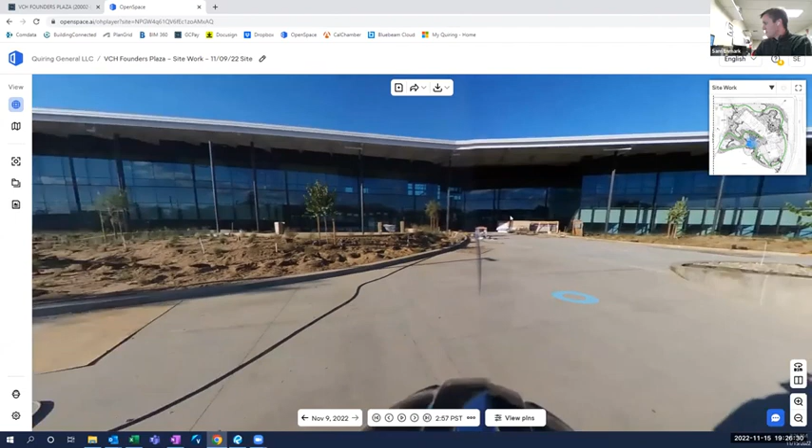Yeah, okay, so this is the Founders Plaza building that we're doing out there. So you can thank Jaime - actually, this right here is Jaime. So this is an admin building for them.

The goal with Valley Children's is, if you guys have heard of OSHPD or HCAI, it's a hospital regulatory agency which makes hospital square footage extremely expensive. So what they're trying to do is move as much of their non-patient care services out of the main hospital and consolidate them into this building. This building will serve HR, finance, marketing, contracting, rev cycle, and offer a space for them to host their guilds, which is their fundraising opportunity.

So that's this building. And like Cary was saying, we're also doing all of the infrastructure out here - improvements of all the roads and landscape areas around this project and throughout the hospital. And then the front yard project, which is a very, very cool landscape job in the front, and it'll be a really cool main entrance to the hospital. So that's the gist of what we've got going on out here.

You can kind of see it from the backside - looking at it, it's a pretty cool looking building, I think, anyway. Yeah, no, it really is. So Valley Children's is probably one of our biggest clients right now.

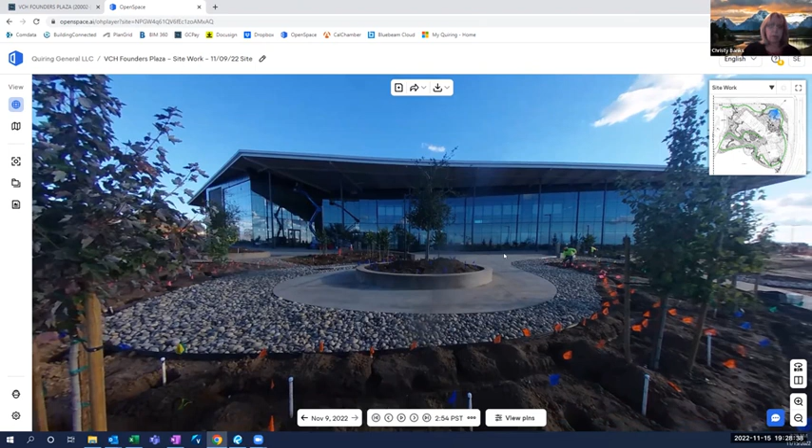We've been doing a lot of their satellite facilities - there's one down here in Bakersfield, there was another one in Madera, and one in Modesto. They're beautiful facilities, they do a really nice job of their designs and stuff like that, and so we partner a lot with them for design builds. This was a full design build project. Did you guys have any problems with like glazing or anything getting that, or any supply chain issues?

Yes, on supply chain issues, not in this case with the glazing. I'd say our biggest hiccups have been electrical components and our elevator. And for a while there, it was our metal decking on this facility as well. That stuff was very hard to come by, because that happened during COVID, if I remember right.

The shortage, yeah, that was rough. I've completely blocked that out of my mind, I'm so into the electrical components. But yeah, the metal decking, which is usually a 6 to 8 week lead time after submittal approval, was 7 months for us.

Electrical is probably one of the biggest shortages right now that we are seeing. Circuit breakers, switchgear, panels, anything of that kind of normal stuff that you normally get off the shelves instantly is really hard to come by now.

So generators, and why is that? Why do you think that is? What's causing the delay? We're seeing certain components, especially in electrical. On our elevator, I can tell you there was one specific component that they needed that was almost impossible for them to get, and they're not getting them in the quantities that they need, so production slows down. It's all coming from China, their electrical component that they needed.

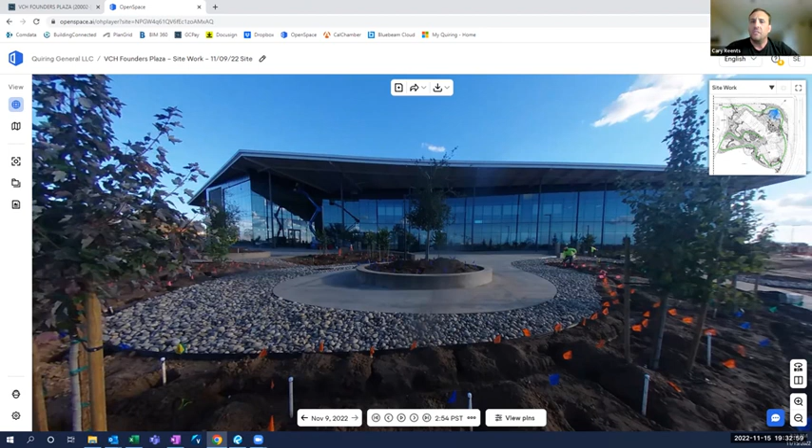So it's a very difficult thing to do, especially in the hospital world. There's some hard lessons being learned right now by hospital staff trying to do their remodel projects to get up to compliance because of that. There's been a few where we just physically cannot get material, so they either delay it or get a variance or something of that sort. I'd say more and more our design is being driven by schedule, probably more so than it ever has been before.

Sometimes there's not an option. It's what is available, and that's what we're going to design to. You're right, Christy, it is crazy. Which is a crazy funny world we're living in right now.

Available at that time, but you never actually know. Unfortunately, I don't know—everyone's heard about all the inflation, right? So what might cost $1 today might cost $1.20 tomorrow at the drop of a hat by a vendor.

So on my job specifically, we were building around a VRF system through Mitsubishi, and unless your product was on a truck coming that day, all your material went up 15%. So trying to explain that to a client during the permitting process—hey, we either try to change the product to save you $500,000, or you pay the $500,000—but trying to figure out what that means in terms of time too.

So in your design, now you have to change to a new product, and then lock in that material as well. All these vendors are being surprised by their own suppliers too, so it's kind of an odd little game going on right now. But yeah, we do the best we can. Yes, we do. There's always a win, we can find it somewhere.

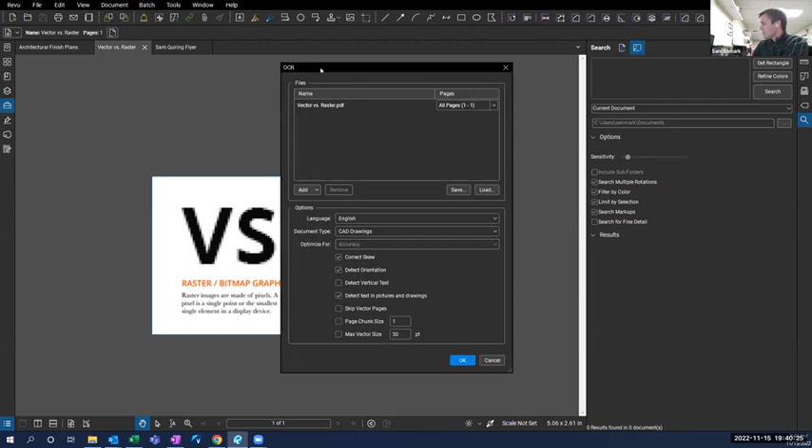There's a bunch of different settings and dialog boxes you can click on. I typically keep just the standard settings it has, unless I need something very specific, but I'd say like 95% of the time this is all going to be okay. And then I hit OK.

It's going to take a second to run the OCR. Obviously the bigger document you have, the longer this will take. This is a relatively small one, so once it gets started, it's going to go fairly quickly.

So it's done that. If you notice, it's now unsaved - it's got a modification to it, even though we didn't really change anything. So if you OCR something, you'll want to make sure you do a control save on that. Otherwise the OCR will go away if you close the file.

So now if I come back up here to the search bar and search vector, I'm now finding those vectors. This is a very small PDF here, but if you have a set of specs that is 1,000 pages long that's been scanned in and sent to you, being able to search is pivotal. You're not going to reinvent the wheel every time you go in there looking for a certain word, right? You can just come up here to Control Find and search for whatever you're looking for, and it'll bring up all of the instances that show up in that PDF.

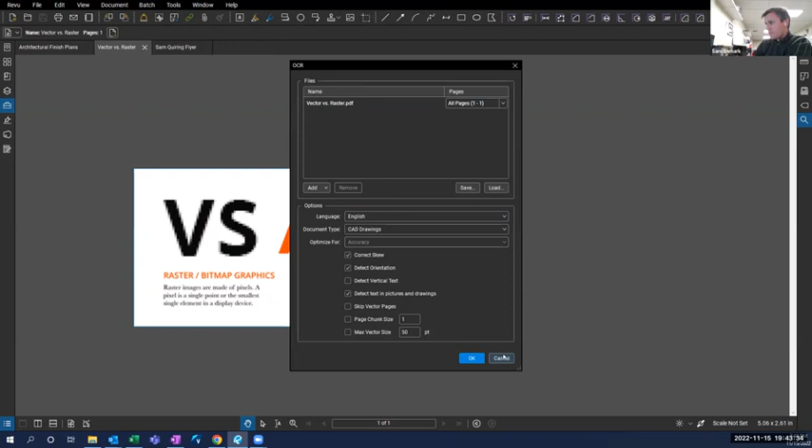But how I did this is I came in here to Batch and then OCR, and then ran it from there. And Sam, I think our licensing is always the newest license, so we should have Extreme. So students, if you have not updated your license and you can't see the OCR, that could be why.

Okay, it looks like Ninod got it. It answered. Yeah, I was gonna say, this is also helpful.

So when you have the OCR option, like control find, you can actually search by image as well. Like if you want to find an instance where there's fire extinguishers or something like that on your plans, you should be able to search that way through the OCR too, right, Sam?

Yeah, that will make everything searchable. And that's part of it, if you wanted to use that as a quantity takeoff tool, you could search and use that in your quantity takeoff.

So I like to foreshadow a little bit. So here you go. It's almost like we worked it out, Cary.

So if you go up here to the search bar, the item to the left is for text, and then the item to the right is a visual search. So you can do this, get a rectangle, and then search a specific item.

This would be an image, or like in Cary's instance, a fire extinguisher, and you can search it, and it should show all the different versions of that. So I know this is text, but it also works for visuals.

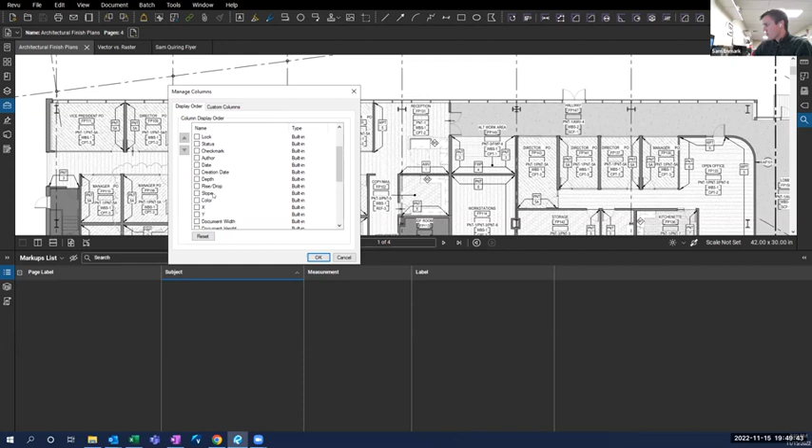So that's how I kind of have these set up, so that all of the information that I get when I start to do my quantity takeoff can be exported and can be used once I get it outside of Bluebeam.

So with that, if there's no questions on setup of the markups list, I'm going to start going through how we do some of these quantity takeoffs. And the first most important part is making sure that your pages are calibrated.

In order to do that, there's a few different ways that you can calibrate a sheet in Bluebeam. The first is going to be the architectural scale, if they list that. So you can zoom in, see, okay, this page is going to be 1/8 inch to a foot. So I'm going to come up here to this calibrate tool right there - excuse me, I'm not going to go to the calibrate tool.

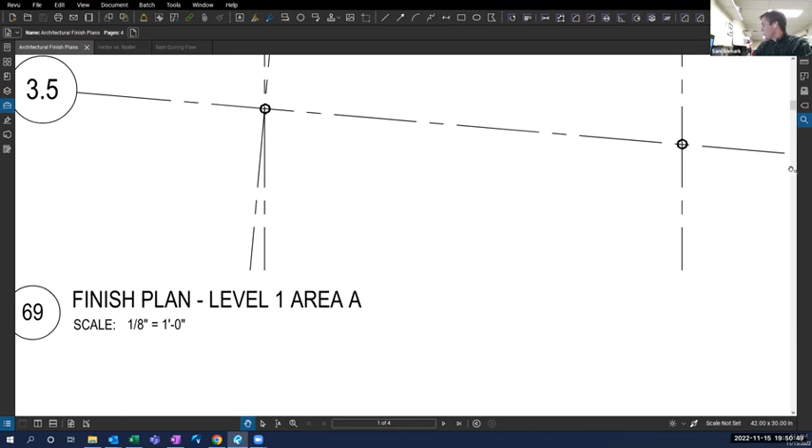I'm going to come over here to my settings, to measurements. And instead of hitting calibrate, I'm just going to select from the drop down 1/8 inch equals 1 foot. And then I can come in, and a trick of the trade that I've learned is always check your scale before you move on to anything, even if you do set it.

So if you look at this sheet, there's really not too many dimensions on it. It's an architectural finish plan, doesn't really have anything. So what I always go off of is something that I know, and I know that this door is 3 foot, right? You'll find a lot of times most of your doors are going to be 3 foot.

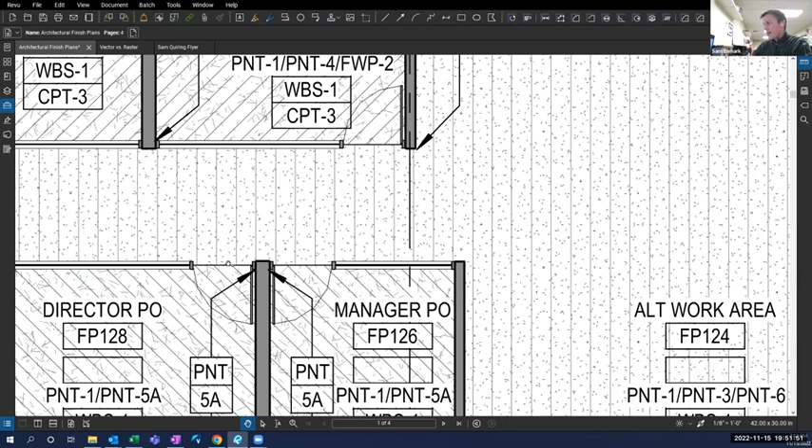Some of them may be a little bit off, so make sure that you're not getting too far out there. But I'll go here, and this should scale out right at 3 foot, right? So I know that I'm good calibration wise with 1/8 inch equals 1 foot. Okay, so that's one way to calibrate the sheet.

The other way is going to be by selecting a dimension that you know. And again, this would be an awful sheet to do this by selecting a dimension that you know, because there's no dimensions on it. But just to show you how this would be done, I know that the dimension between grid line D and E is 30 foot.

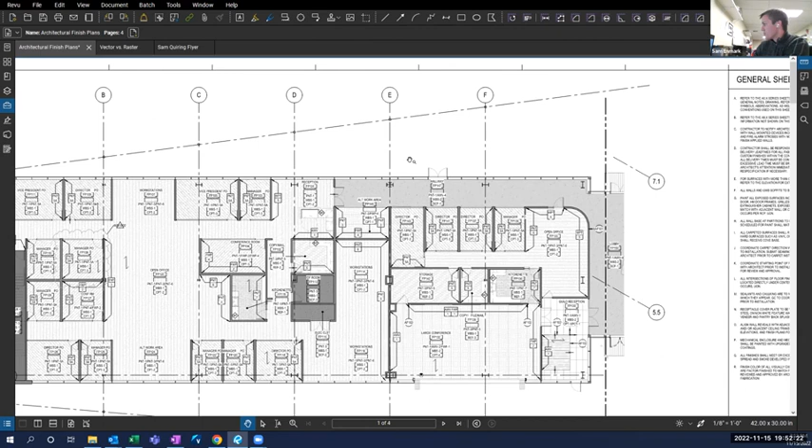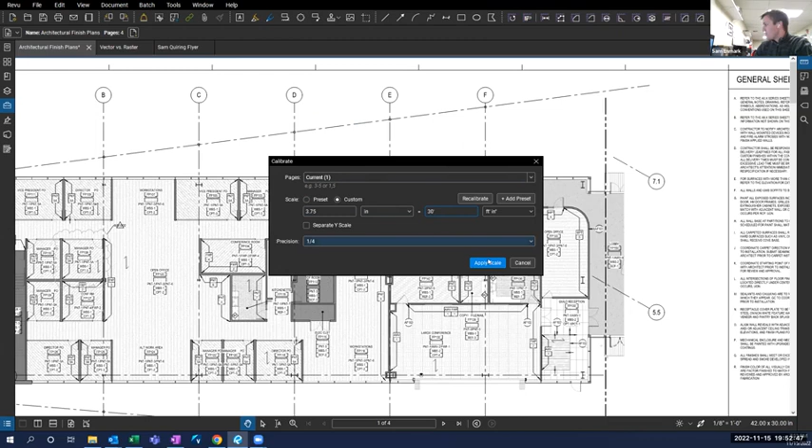So what I'm going to do is hit the calibrate tool. It's going to have me pick 2 different spots, and you want to make sure that this line is at 90 degrees. Select that, and then it's going to say how this reads will be - it took a measurement on the sheet of 3.75 inches. So you're going to say that that 3.75 inches is 30 feet, and then apply the scale.

And then again, I'm going to want to make sure that this door down here is 3 foot. And it is.

So with that, I now know that this sheet, and this is going to be where I'm spending most of my time here, is calibrated. So all of the measurements that I take on this sheet are going to be good. The worst thing that can happen is you forget to calibrate, or you calibrate it to the wrong scale, and you spend an hour doing a quantity takeoff on something, and the measurements that you get are completely wasted or no good because all of the work that you did was in the wrong scale.

I would also say that confirming the architect scale is important. I had this happen on this project. Our civil scale should have been 40 feet, but it was listed as 80 foot, 1 inch equals 80 foot. So everything I did based off that 80-foot scale was wrong when I did my takeoff, because the architect or civil engineer had the wrong scale on their drawings. So double checking based off of a dimension that you know is always good.

Can I throw in a hint there too, Sam? I got two more for you. One, be careful if you set scale to not apply scale to all pages. Not every drawing has the exact same scale size. Architecturals on this sheet might be 1/8 of an inch to a foot, but when you get to the details, some might be 1/4 inch to a foot or something of that sort. So be careful about applying that to every page of your document. They're not always the same scale.

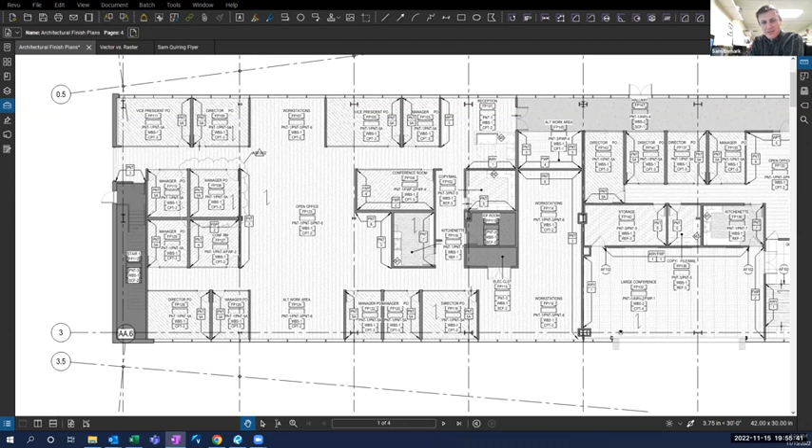Yeah, just to build off that, Carrie, in order to do a quantity takeoff, you're gonna have to scale these drawings and do that. However, if you're ever a field engineer or you see a superintendent out in the field laying something out after they've scaled a drawing, raise your hand, because that's not how it should be done. There should be dimensions on the drawings that you can do the math from in order to figure out exactly where this wall lays out.

And keyword: should be dimensions. Sometimes it's exhausting, because I could tell you within a couple seconds how far this wall is from this wall. But if you don't lay it out off of the dimensioned drawings, which is going to probably have you do math from here all the way to this wall and back to get to a certain wall, you open yourself up for issues down the road if something isn't laid out correctly because you scaled it instead of reading the architect's dimensions.

Now, if the architect is missing dimensions, it's helpful to send them what dimensions you're scaling and say, please confirm these are correct, an RFI or something of that sort. So it is a very helpful tool, because all they have to do is look at what you got and go, oh yeah, you're right, it's good. So there's definitely a difference between estimating and production in terms of how you use scale. It's a good note to know, depending on your position.

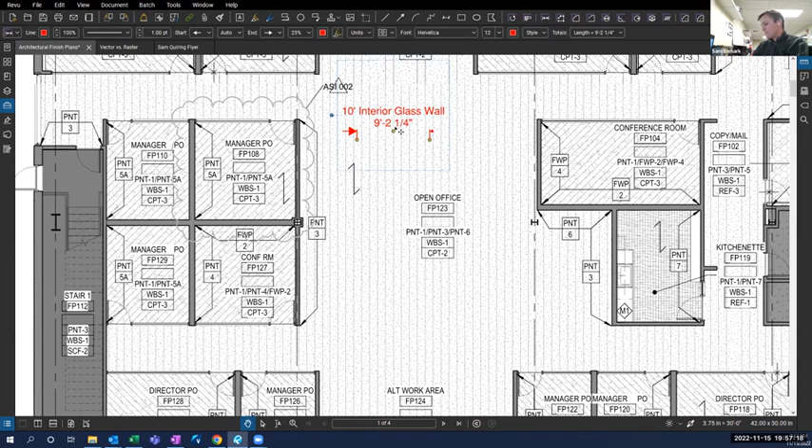All right, so with that, I'm going to do a quick run through of all the different tool options we've got. Once the drawing has been scaled, you've got your length tool, which is going to be your standard spot to spot - this is 9 foot 2 1/4 between. You've got your poly length tool, which is going to be useful, and we'll use this one a little later if you want to get multiple dimensions, like how many feet of base is coming around this room. So I go spot to spot, and when I get done, I don't necessarily have to close it - I can just hit enter, and it will do a kind of polyline there.

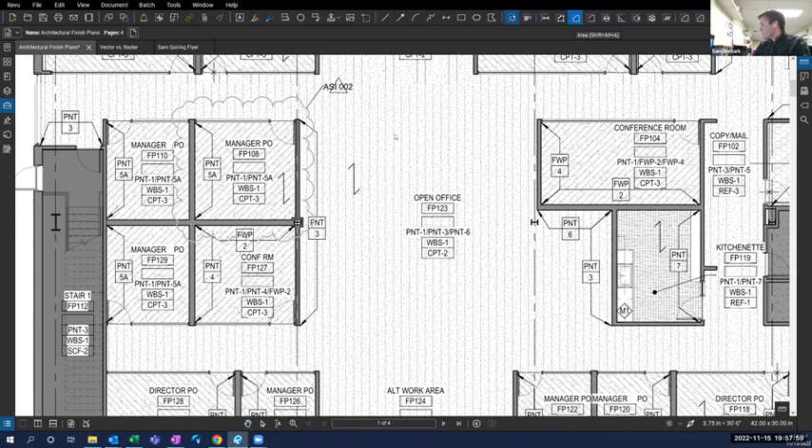You've got your area tool. You can do area in two different ways - you can do a square real quick by clicking and dragging, or you can do an odd shape by clicking once, clicking again, and so on, to get whatever shape you want.

The perimeter is going to be, I think this is the one that you have to close. So you would close that and get the perimeter of the space.

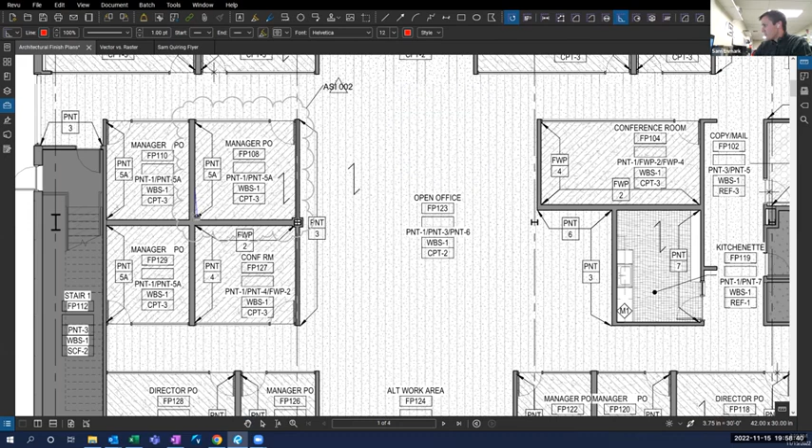Diameter, you can draw a circle at a specific diameter or take a measurement at a diameter. You can measure the angle of a wall if you needed to. Most of these are going to be 90 degrees, but you can come and get that, and that's 89.12, which means I probably just clicked off somewhere.

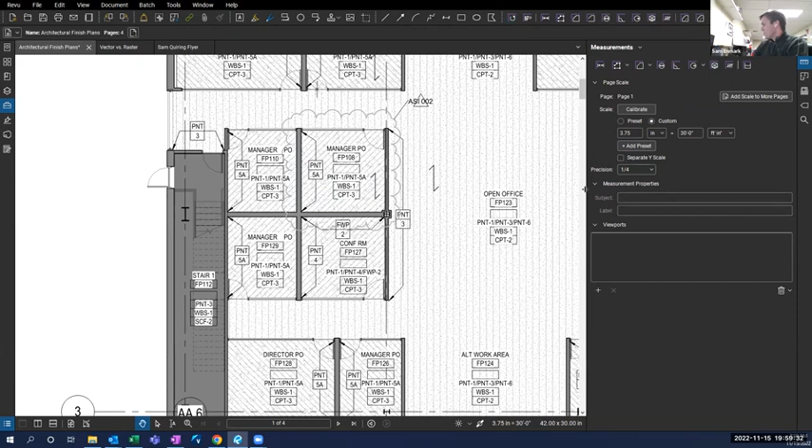That's the angle tool. Radius, very similar to diameter, but is going to be just the radius of it, if you're taking a measurement that way. Volume, one of the important parts about volume is they need to know depth. So if you come over to your settings, you can see this depth here. If it's 0, your volume is going to be 0. But if you change this to a 2-foot depth and then treat it similar to the area tool, it gives you how many cubic feet. Don't use that too often inside buildings, but on some exterior work, you could find an instance, like a concrete takeoff, where you're adding some depth to a takeoff.

Count is something I use quite often. It's a very easy tool. Instead of physically counting them and forgetting where you're at, when you're doing a count, you can just click, click, click away as many as you want. Say you're counting doors, you can do that. When you get done, you just hit escape.

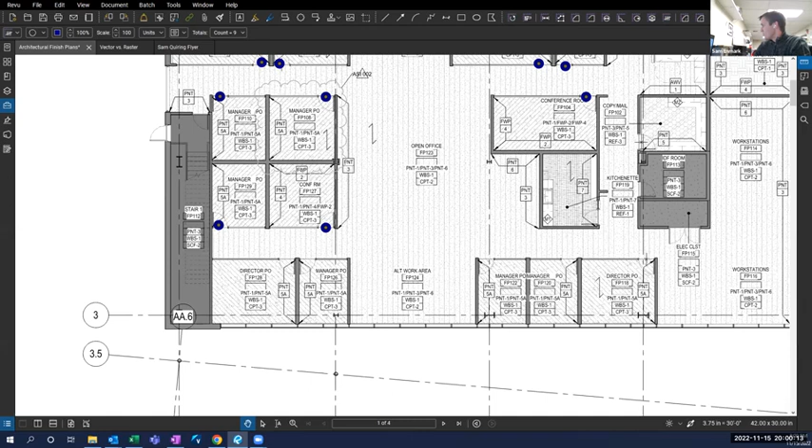And then if you look at your markups list, you can see you've got 9 count, or you can come over here to your settings or to your measurements, and you should be able to see the settings, and you can see that your quantity is 9.

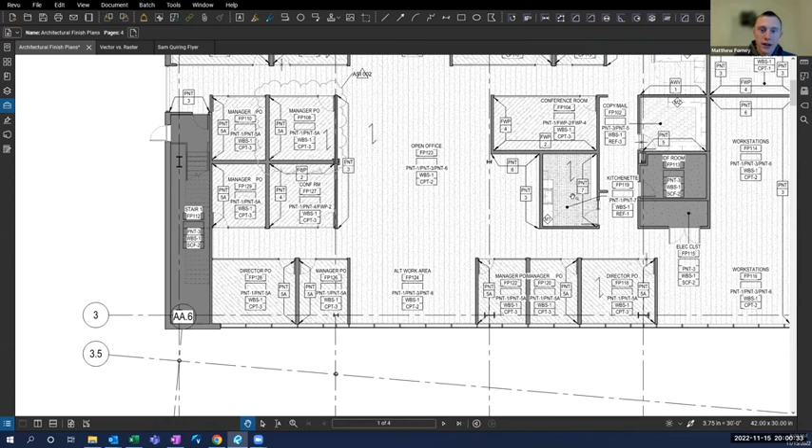Hey Sam, real quick. For the count tool, is there a way to have your count span multiple pages? There is, and I think if you're in the same document, you should be able to just go to the next sheet and then continue that.

So if you're still in the tool from before, you can click to the next sheet and then continue the count. And then when you look at this, how I have it set up in my markups list, it's going to give me the page label: on page 1 I had 2 of them, on page 2 I had 3 of them, and on page 3 I had 1 of them.

Okay cool. And if you ever get to a spot where you've counted what you thought was just about all of them, and you realize you missed one, you can click on it, right click, and resume count. So then you can pick up right where you left off and finish off your door count.

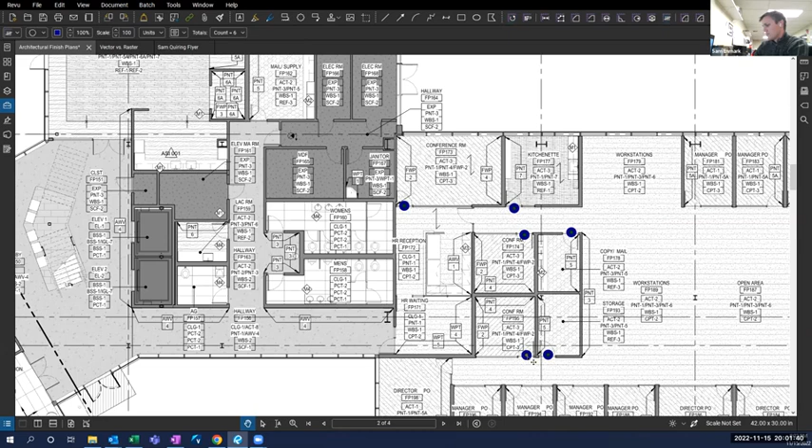And Sam, can you also show back where you had on the settings? There's, say you want to use check marks or some other tool or shape to do different types of doors or windows or whatever. Yeah, so I was using just whatever I had set as last. But Christy's right, you've got all of these different options for all your different tools. So for the count, you can use a check mark, triangle, square, diamond, circle. You could also create a custom tool if you really wanted to for your count, and that would be part of your toolbox, so you could do different things there.

And then scale, I could make them bigger if I wanted, or I could make them smaller. And another thing I find useful is the opacity. So if I put this count, say I'm counting the amount of walls I have to paint with this PNT 5A, which is our paint 5A, and I put the count right over it and can't see it anymore, then if I adjust the opacity down to like a 30, I can still see that I've got the count, but also see what it's for.

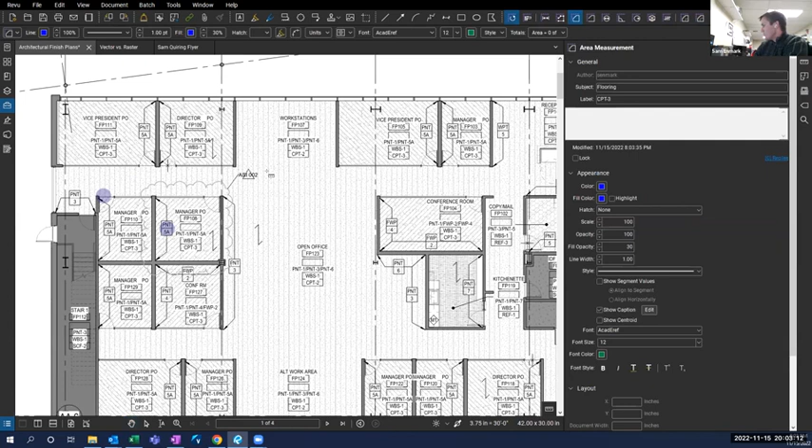So all of these tools, well let me do the last one here, these polygon cutouts. So if you have an area, let me do something that actually makes sense here. I'm going to take an area of carpet right here, and I've got this carpet 2. And then inside these offices, I see, okay, this is actually carpet 3, so I want to take that quantity out. I can actually use the polygon cutout tool and go take that area out of my quantity measurement, so now this area inside isn't counted to the total.

And what you've got to be careful of here is once you take a cutout, you can fill this in, but sometimes it's a little finicky on exactly what you can fill it in with. So right now I could fill this in with something else, but I couldn't fill it in with multiple things as far as I know. So if I wanted to do one of each of these rooms, I couldn't do that with this cutout, because it's one singular cutout that's going to be filled with one thing.

So those are all the tools in synopsis and what they do. One thing we alluded to with the measurements or with the count is that all of these different tools have a million different settings that you can make them appear however you want to. So you can change your dimension tool or your length tool.

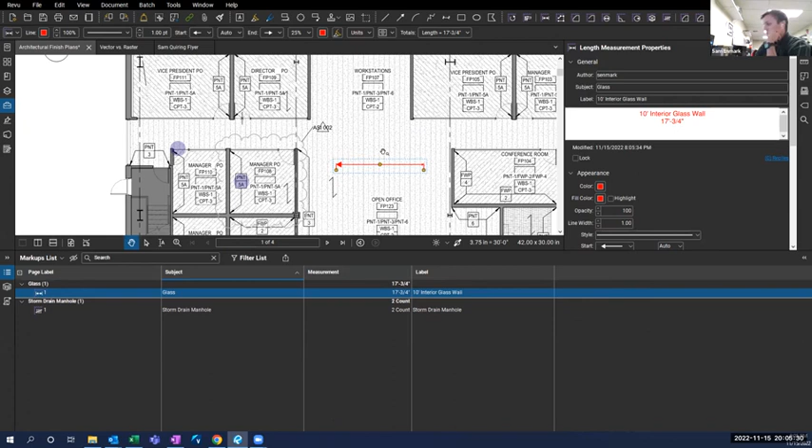The data still lives down here. So I still know that this is a 17-foot, 3/4 inch line, but I just don't need to see it on my drawing, because before you know it, you're going to have all of your different lines crossing over each other, and it's going to be a box of text instead of the actual dimension tool you want to see. So I'm going to turn the caption back on for now, but it's useful to know that you can do that.

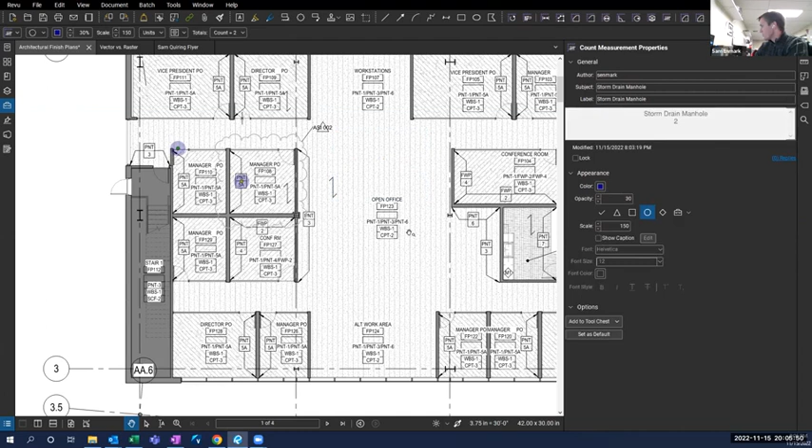So Sam, just a comment on that polygon cutout tool. Say for example, and I think this is where you would use this, is say you've got exterior siding on the side of your building and you've got brick. If you went to the elevation plan and took off that siding and then cut out the windows and doors, you could get that dimension for the brick or the siding, correct?

Yep, absolutely. Instead of having to trace all the way around it and do that, that's a great use of that tool for your exterior. And then you could fill that with a fill that is your window. So then you could have a square footage of your brick with a square footage of your window.

But where you struggle is, say you had... oh gosh, I'm trying to think of an example of this. If there were two different things, say you had a metal panel and you had stucco, and your window within that opening, you couldn't differentiate between the stucco and the window in the opening if you do that cutout. It would just be the one tool.

I see. So if you do end up in a situation like that, you would have to just trace all the way around with your area tool.

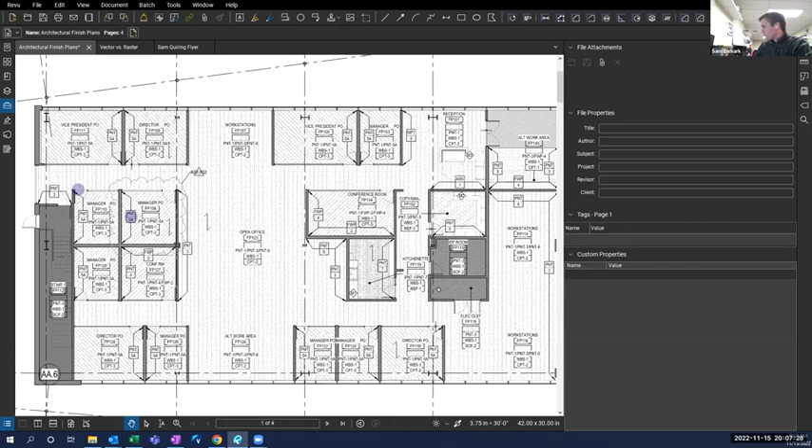All right, that is kind of a run through of all the tools. And now we're going to get into actually taking some of these measurements and getting them into a format that makes sense and is usable.

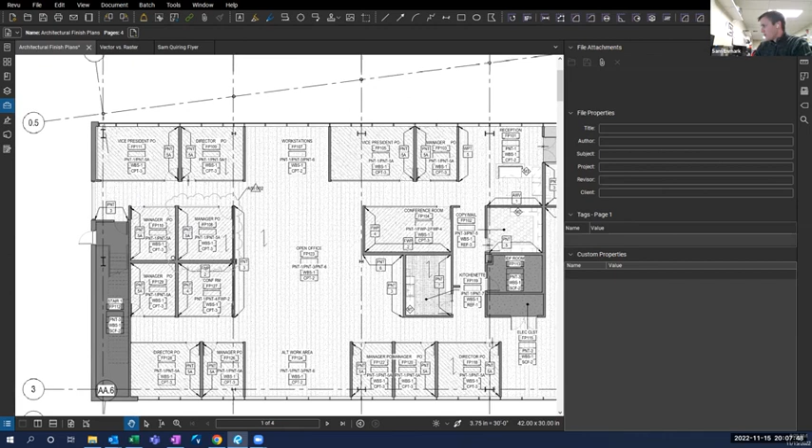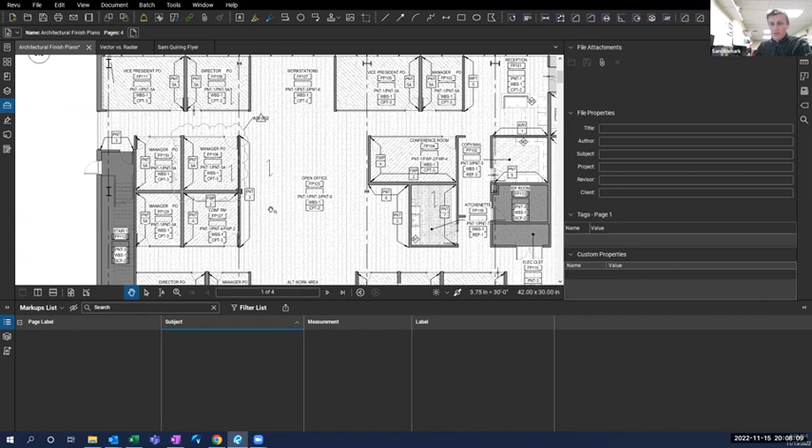One of the most important things, if you noticed when I was down here, I had subject and label. For me, that's going to help me identify everything that I'm going to be taking off, because what I don't want to do is do a takeoff of each item individually on a sheet or have different sheets for different items. I want all of them to be living on the same sheet and be identifiable.

So if you look at any of your tools, you can see up here, if you go to settings or properties, you've got subject and label. How I typically treat this is, for this one, I'm going to use this section right here. And I'm going to do a takeoff of all of the flooring in this section along with base.

I'm also going to do some like 10-foot exterior or interior walls, which all of these walls right here are glass walls, and everything else is framed. So I'm going to start with my carpet. Right here identified is carpet number 3, and I notice all of these rooms are going to be carpet number 3. So I'm going to come over here to my area tool and start by getting my settings right.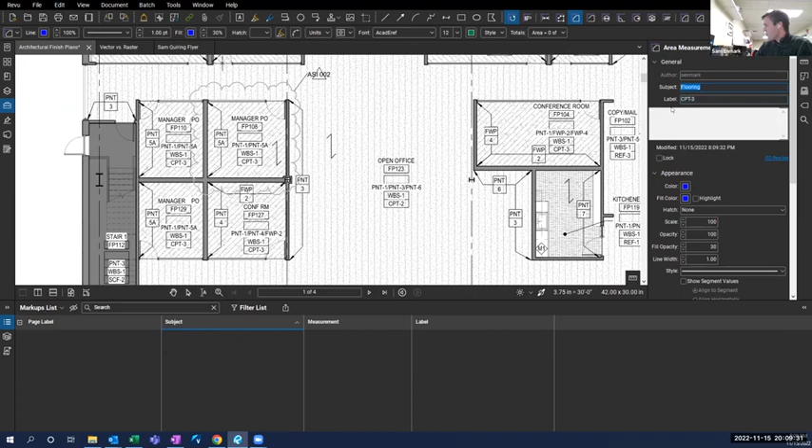So in the subject, I'm going to have my subject as flooring. That's going to be my big picture overarching title for all of my flooring. And then label, I'm going to label them all individually. So I'm going to start with my carpet 3 in the label.

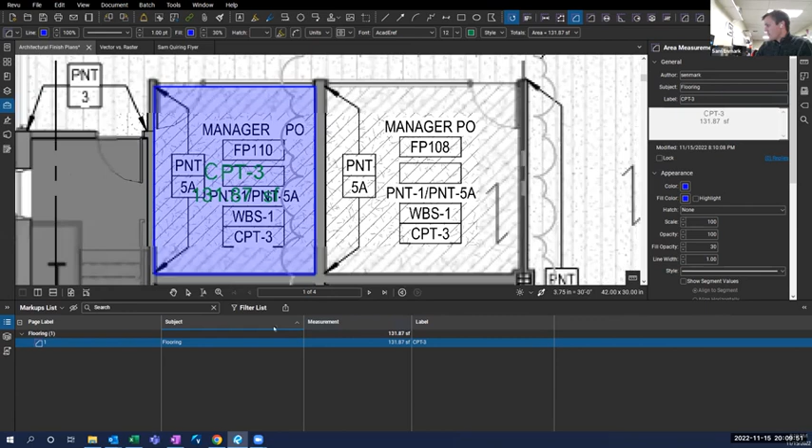And then I can start taking my measurements. So these are pretty square rooms, so I'm going to click and drag from corner to corner. You can see right here, carpet 3 at 131 square feet, and that populates down below. I'm going to continue doing the same thing for these 4 rooms.

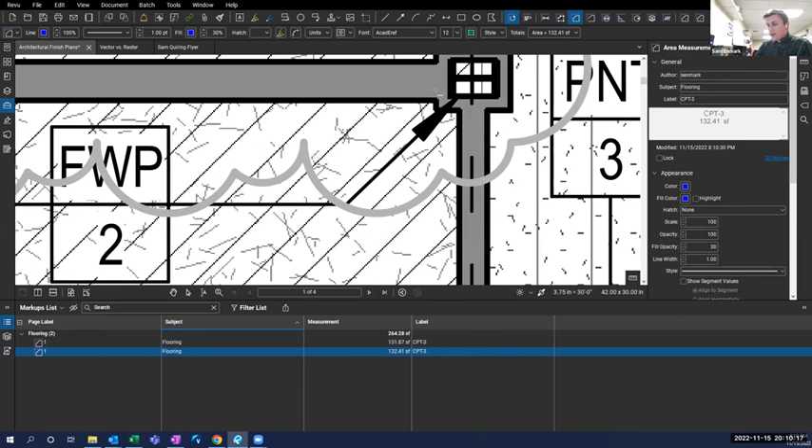Again, all fairly square, so I'm going to be as precise as I can. If you see this little notch, I'd say that for an estimate, this is insignificant. But if you wanted to capture that, instead of just clicking and dragging, you could click, click, click to capture that square, and then close it off with enter.

And then someone got something? Yeah, no, there's no questions so far. Sam. Okay, sorry, I must have heard something.

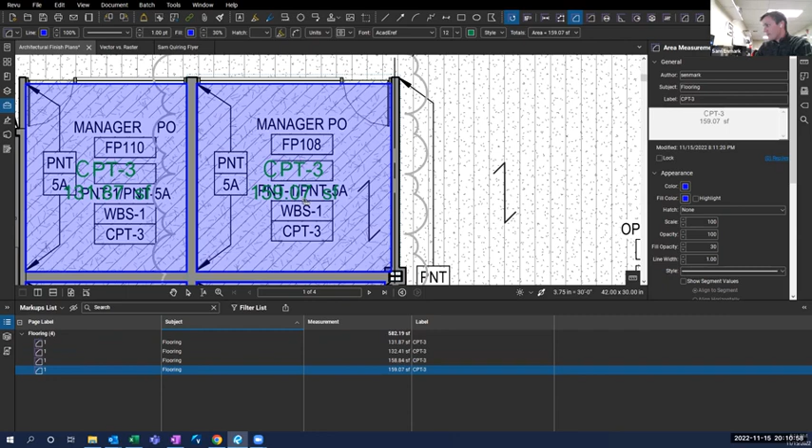So anyway, this room, I'm going to finish off by just doing a square there. I capture a little bit there, but I'm not concerned about that overall. So now you see all of this - I've got flooring labeled, the square footages with the overall square footage, and then my label, which is all the carpet 3.

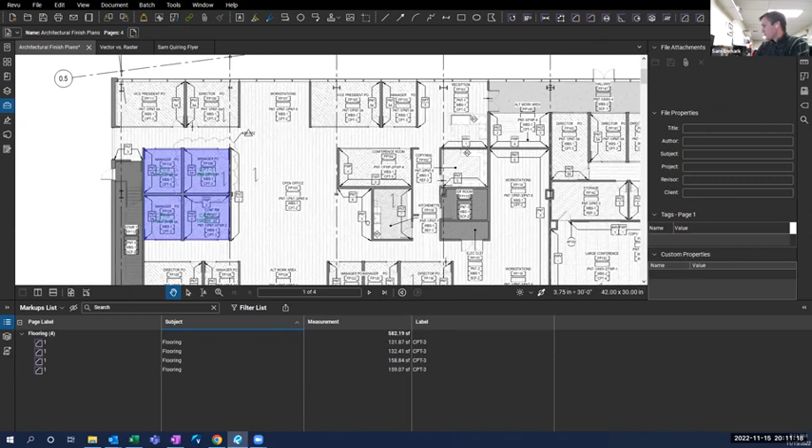So now, I'm not going to do this full takeoff because this carpet 2, as you can see, is labeled and comes all the way around and does a bunch of weird shapes here. But just to keep it simple and show the different kinds of carpet, I'm going to come here and do carpet 2.

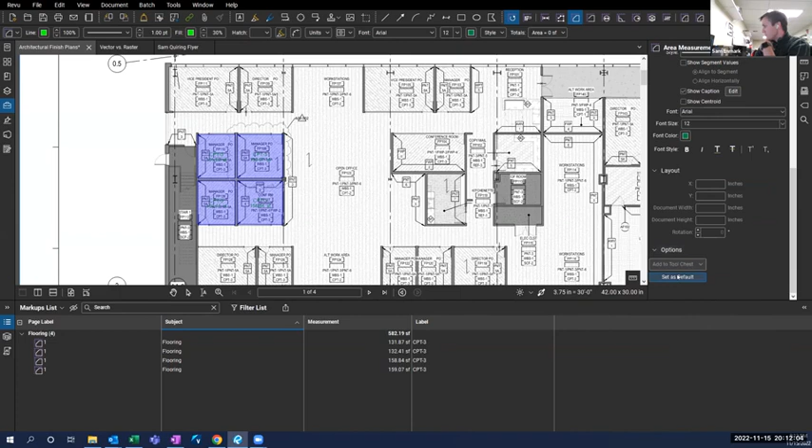I'm going to change the label. This is important because before you move from one measurement to another, you want to make sure you're correctly labeling it. And then the color, I'm going to change this to green, and then change it back to whatever it was. I'm going to come down to the bottom and use the set as default, so now my default when I go to use this tool is going to be carpet 2.

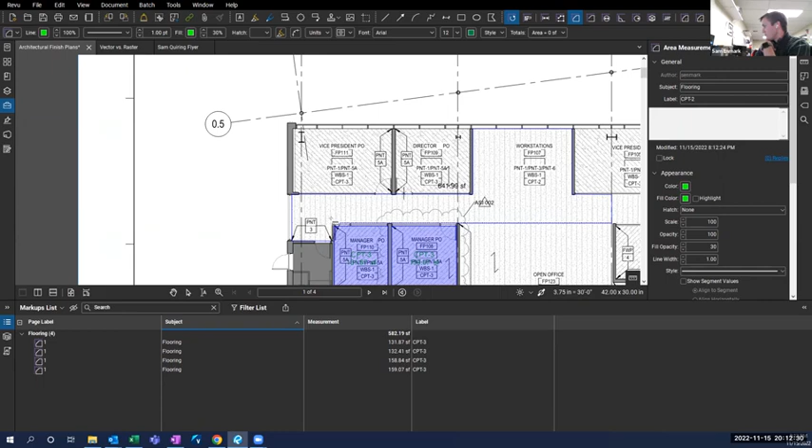So I'm going to do just a quick measurement for carpet 2, and trace around this room, set it off here. And I come back to there, so you can see this is labeled as carpet 2.

So it still shows up in my subject of flooring, which is what I wanted, but now has a different label. This will make it so that when you export it, you can differentiate between all of these. How this is sorted right now is by the page label, but if you want, you can switch it to label of the markup, so now it differentiates between carpet 2 and carpet 3.

Okay, so now the next thing I want to do is, I've got my couple different carpets, and I want to get how much base I'm going to need in these rooms. So I'm going to use the poly length. The reason I'm not using perimeter in these rooms is because of this glass wall - with the glass wall, it's not going to have any base on it, so it's just a 3-sided room with base.

If this were 4-sided, you could use perimeter, or you could actually get the perimeter value from this one. There's another tool you can add onto here that would take the perimeter of this rectangle or square we just made. But for now, to get the base, I'm going to go to my poly length. I've already got my subject set as wall base, and you could put this as flooring if you wanted, but I'm going to keep it as wall base, and the label is WBS1.

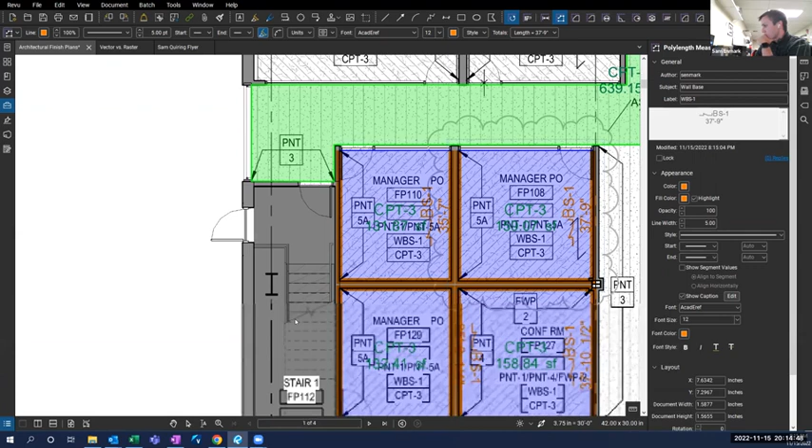And then the last one that I'll do is just to get a dimension for this glass wall. So I'm going to take the length tool, and my subject, I've got glass, and I've got a 10-foot interior glass wall. So I'm going to click the two points for these 4 rooms.

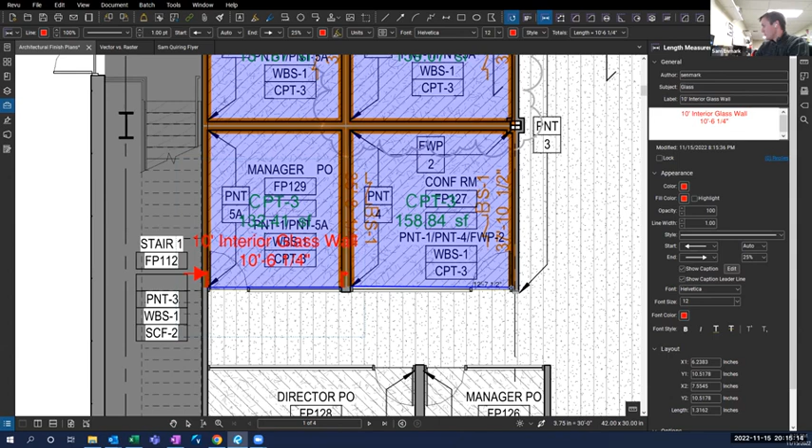There you go. And now it will all show up down here separated by all of the different line items.

So any questions so far on the quantities, how you get them, and what I'm trying to do here by separating all of these out and making sure they're labeled properly?

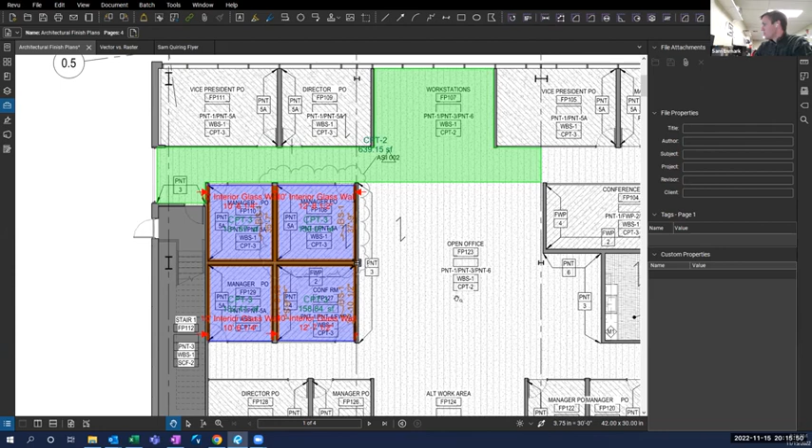Okay, so with that, eventually I'm going to export this into Excel so it's a little more maneuverable and I can start applying dollar values to it. That can be done in Bluebeam as well, but I find it kind of cumbersome and less maneuverable than if you were to just export your items to Excel and work with them there. But before we go out of Bluebeam and into Excel and export all of these, there's a tool here where you can select all of these and create a legend.

So that you know how much you have of each individual item. As I look here on my legend, I can see it's actually not quite right because I've got two different floorings that are just labeled as flooring.

So in order to edit your legend, you can come over here to your properties and edit all the different columns that are showing up there. So instead of it being the subject that's shown, I'd rather have it be the label that's shown. So I'm going to come over here to label, and take the subject off because I don't really care about that. Or description is what they're calling it in this one. And then I'm going to hit OK.

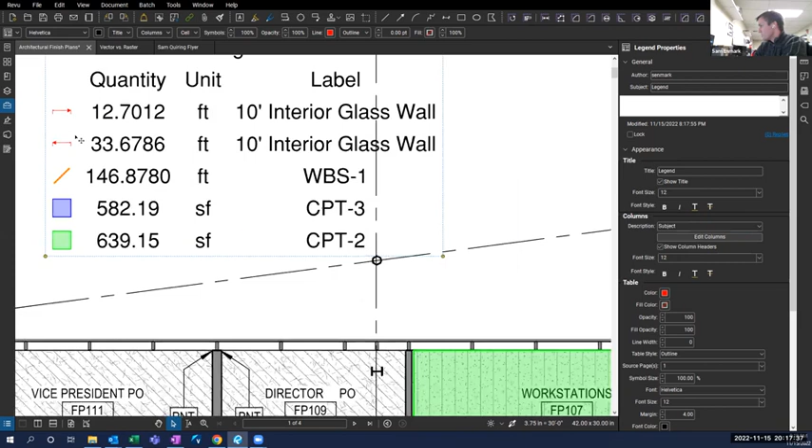And now I've got my quantities as carpet 2, carpet 3, wall base. I'm not quite sure why these are showing up as two different interior glass walls. Yeah, I'm going to have to look at that, why they're showing up.

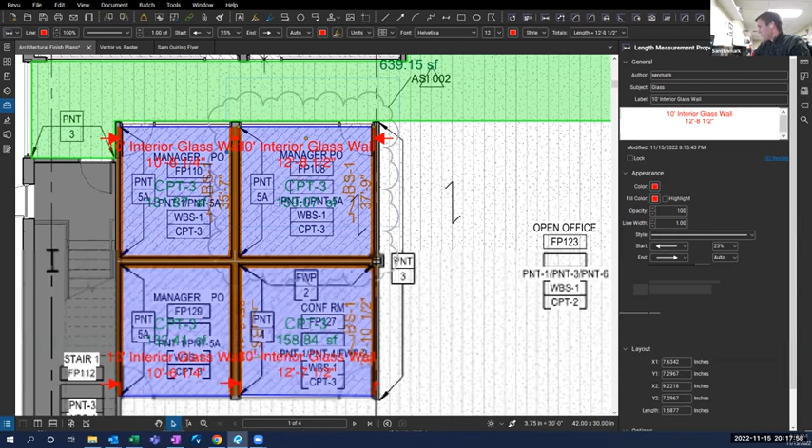They should all be showing up as one interior glass wall because I have it labeled exactly the same. But that's kind of the idea, that you can modify this legend however you want to, and it provides you with some useful information.

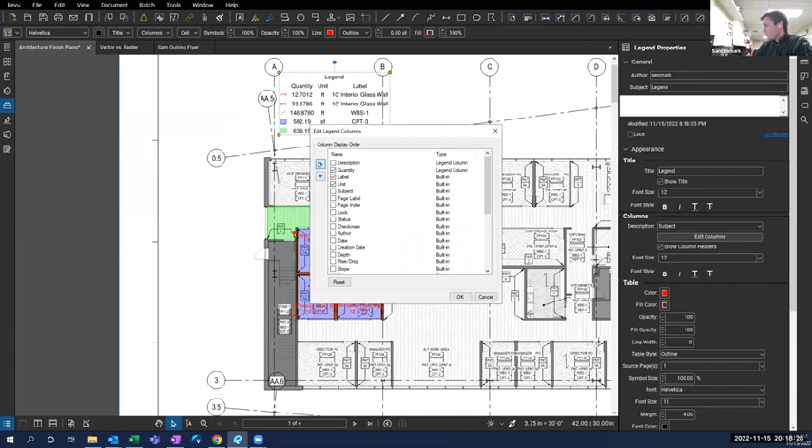And you can always adjust it - if you don't like that it shows quantity and then label, and you want the label on the left side, you can edit the columns so they're moved in the right order by clicking on it and moving it up. So now the label will be on the left and so on.

So before we get out of this, I'm going to do what Carrie was talking about earlier and look for specific items that we could do a quantity takeoff of through the recognition or search tool. So I'm going to open up the search tool again. I just hit Control F to bring this up, but it's also down here. I'm going to go to Get Rectangle.

And for this one, I'm going to want to find all of the AWV1 on this project. So I come here, click, select this area, and then hit search.

Depending on the settings and the sensitivity you put on there, if it's highly sensitive, it's going to only pick up exactly what's in this box, looking at all of these gray lines coming through here and picking up only exactly what I just selected. If it is less sensitive, it's going to pick up anything that looks somewhat like it. So as you scroll through and see, you have AWV1, you've got FWP4.

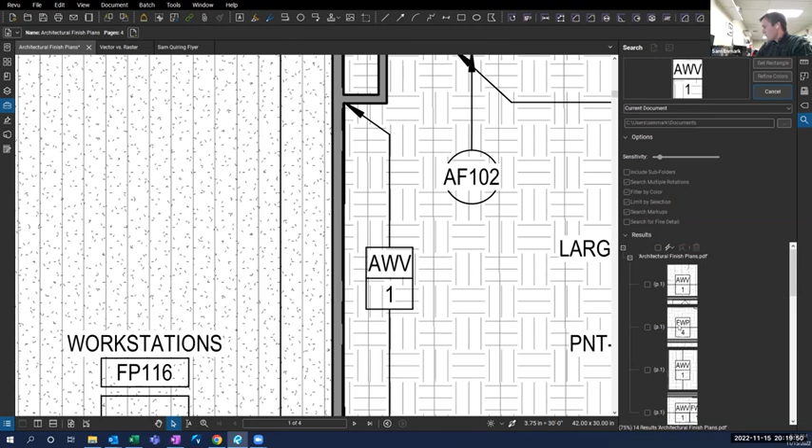I don't want all of those. So what I'm going to do is just click the ones that I do want, and you can kind of see them here. So I want this one, that one, that one, and continue to go down. And then once you've got all of them selected,

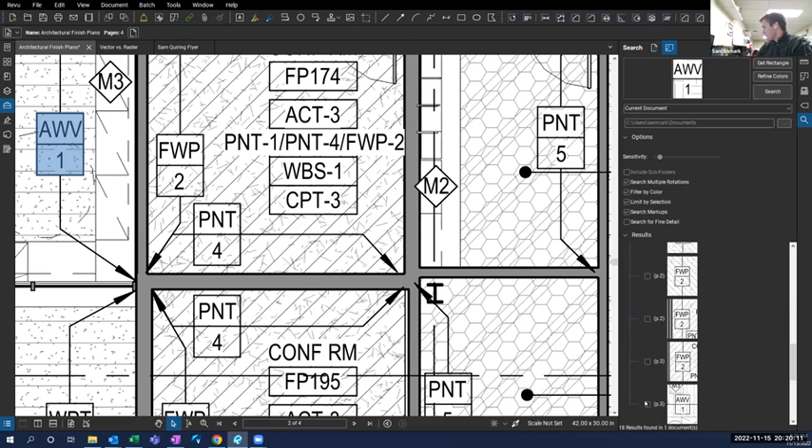you can come up to the top, and then this hyperlink or lightning bolt, you can apply a count. So I'm going to apply the count as a red triangle. So now there's a red triangle on all of those.

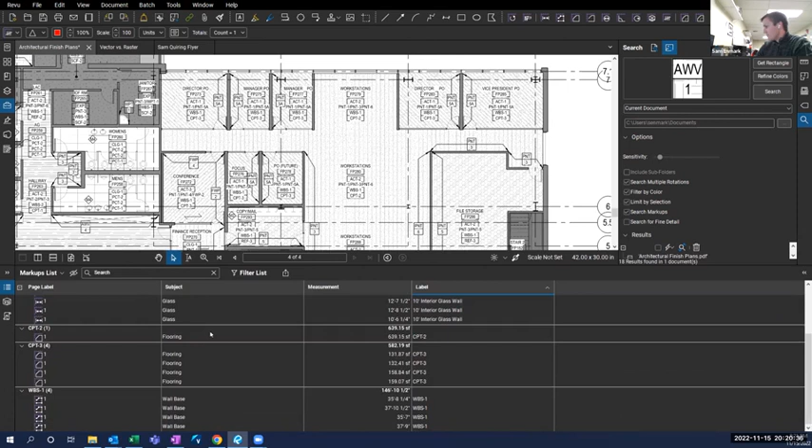And again, the settings are to whatever I defaulted to last, so we'll find out what this measurement is. It's just called a count measurement. So I'm going to select all of these and change the settings so it shows subject, which will be wall covering, and then label, which will be AWV1.

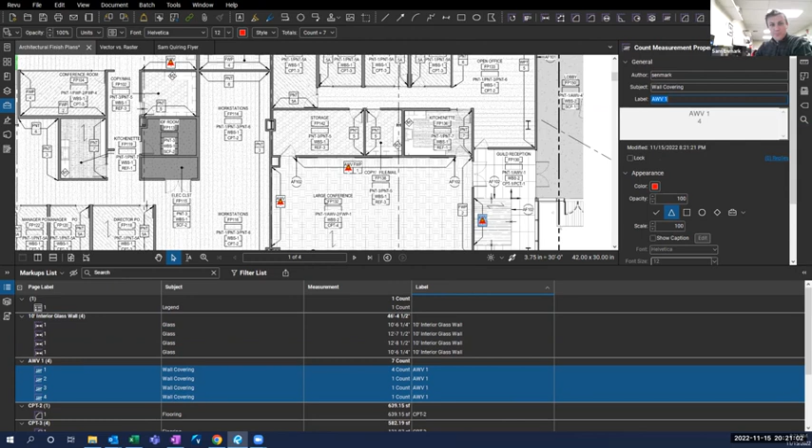Hey Sam, real quick, back to the sensitivity of the search tool. Which is it, left or right, that's the most sensitive?

That's a great question, let me see here. So I think right is more sensitive, left is less sensitive. I have it fairly low on the sensitivity scale, that's why it's bringing up all of the FWP2s and the AWV1s. But I think if you turn it all the way up, I'm probably going to end up with a search that comes back with potentially one result for one item.

Oh yeah, looks like it, huh? Yeah, it's being a lot more specific in what it's looking for. So it's kind of one of those things, the search tool, especially for an instance like this—if you can see, this one only found 2, whereas previously I found a ton more.

So the search tool is useful, but you're still going to want to double check in this instance that, okay, that is in fact all of them. It helps so I don't need to look at these ones anymore—I know they're AWV1s—but you still want to double check it because it's good, but it's not perfect. The last thing you'd want to do is rely on it and miss by 5 or 6 spots, especially with this, because the AWV1 is like a nice wood panel they put on this wall. It'd be a pretty expensive miss if I missed 6 or 7 of these locations.

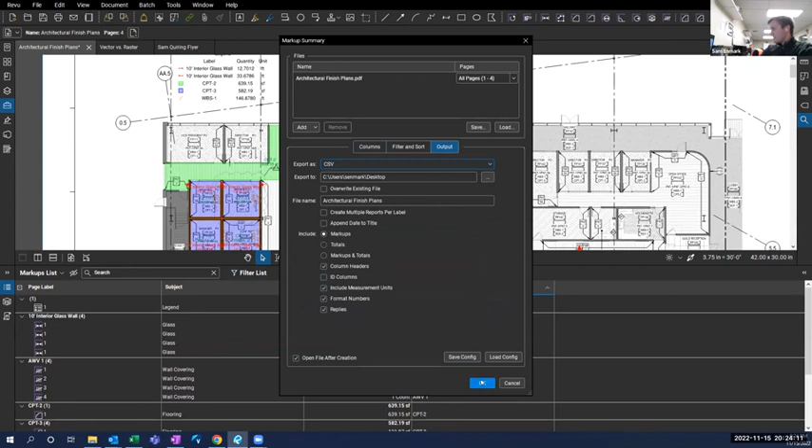You can adjust your columns here, but I've already got them set up how I want, so I'm not going to worry about that. Most of these others are set up how I want them to, and they're rather default, so I'm going to hit OK. It exports my items into an Excel, and now I can maneuver this Excel how I want in order to get the quantities I'm looking for.

So I'll select all of this, go to data, filter, so I can apply filters on the top. If I'm looking for just my AWV1, I can do that and get the quantity for these guys—sum of 7 of them here. This is just a little bit more exportable or maneuverable to some of our estimating softwares and programs.

Once you get into this with your quantity takeoffs, you'll have a format that really works for you. Everybody's format is a little different, even within our company—every company's format is probably going to be different, but the gist of getting this information into something that's palatable and can be transferred somewhere else is, I think, the most important part.

So I guess this is kind of the end state of what you want to get from Bluebeam.

One of the other items that's kind of cool with Bluebeam, and I think underutilized—but you have to have things set up just right for this to work—is I've got this takeoff, and say I've got a pre-filled form that I use with my company. My company's got flooring, say it could be hundreds of lines long, but for this instance I'm just going to use this one. So I've got my carpet number 3, and I want to get the quantity from Bluebeam.

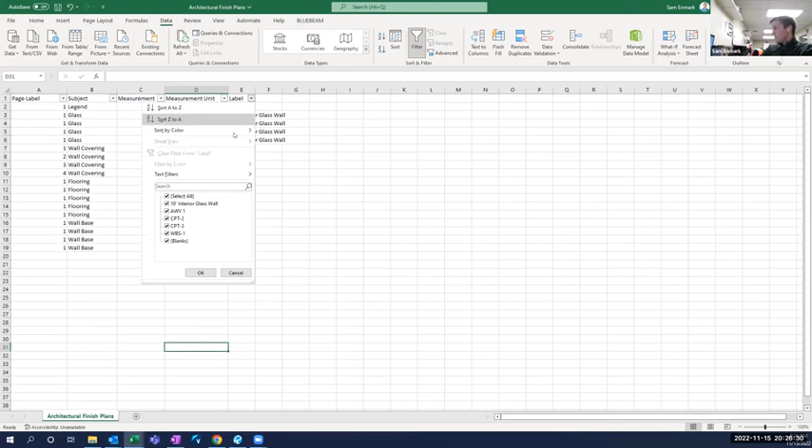One way to do that is what I just showed you, and come in here, find this export, get my carpet number 3, and say okay, I'm going to take this, and then I look down here just for the sum. So, okay, 582.19 square feet of carpet number 3.

And I go over into my estimate—I already forgot the number, but I think it was about that, $582.19, or 582 square feet. These are just some dummy numbers I threw in to get an estimate, but at $9 a square foot that gives me $5,239 for the estimate.

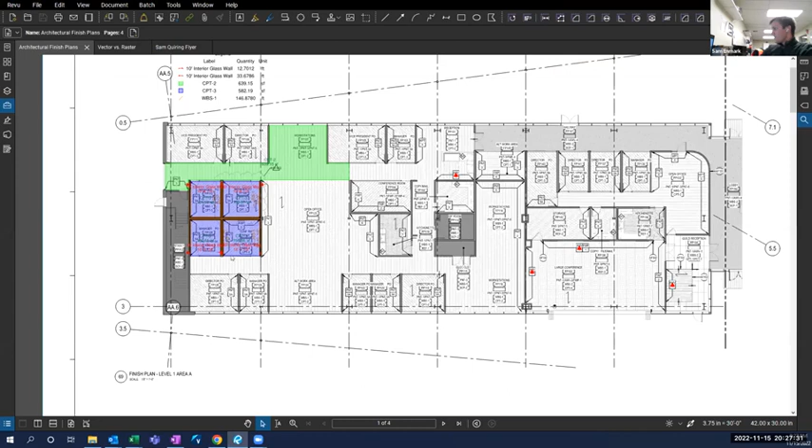All right, real quick, I got a question about how we calculate in decimal feet instead of feet inches. So just to clarify, are you saying from this point where it's feet inches, and then when you look at the Excel it's in decimal feet? Yes.

So that automatically does it. Excel is not great at representing feet inches, so it transfers everything. When you export it, you'll see it in decimals.

Okay, so what I did was I had an XML file of the feet and inches, so I had to manually convert them into decimals, like divide by 12 and everything.

Interesting. When you exported, so you had something that looked like this, and then when you went to export, let me see here, you exported into XML. Let me see if there's a...

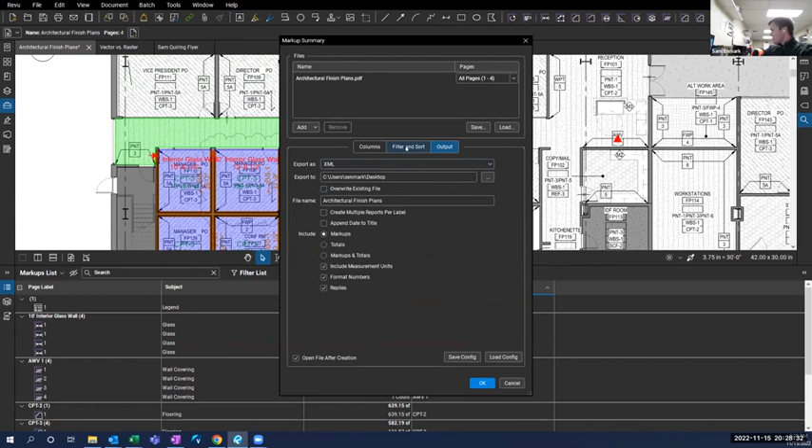Now you have to open a new Excel and open the XML file over there. Okay. I'm not sure why that was, and it kept it as the feet inches for you.

Is there a reason that you exported to XML instead of like a CSV? I just went with XML. Yeah, I'm not sure why it did it in XML, to be honest, but I've found that pretty much every time I export something as a CSV, it takes it and converts it into a decimal.

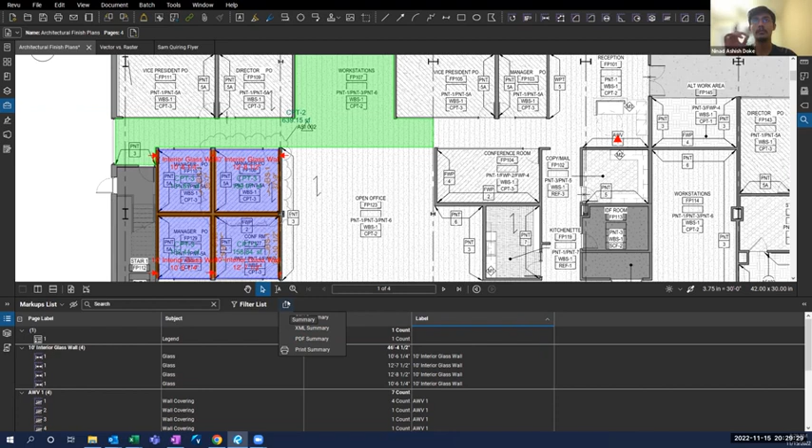Okay, and is there a way that it can do that on this Bluebeam sheet, while calculating the dimensions, let's say instead of 6 feet 6 inches, I need it to be 6.5 feet?

Yes, so there is, let me see if I can remember how to do that. Forgive me on this one, I hardly ever work in decimals in Bluebeam, but let me see here. So you have feet.

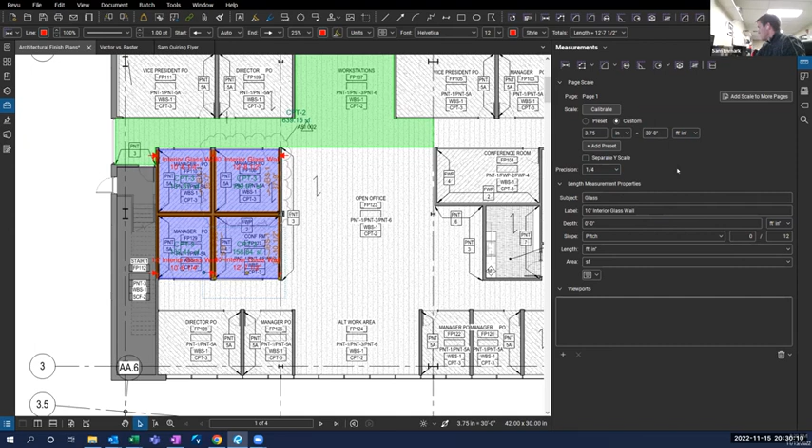You have to select the markup, Sam. Do you? Yeah, thank you. You change the length down there at the bottom instead of foot inches. There we go, thank you.

Inches or... it doesn't give you... no, I think so. And if you just go feet, it will give you in decimal feet. Yeah, that'll do. Yep, so 12.62, or if you go inches or whatever it may be, so foot inches.

I think the only time that you'd probably utilize that would be on a civil drawing, because they actually work in decimals. Everybody else works in foot inches.

But I think one of the important things is even if you were to do this takeoff, it is adjustable if you needed to. So as long as you're taking measurements from one spot to another visually, you can always change how those read out at a later date if it's not reading out quite right.

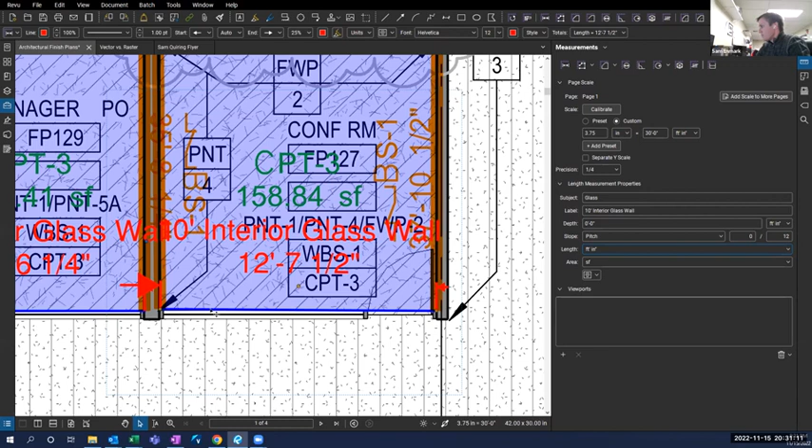So sorry, I know I didn't answer your XML question, but hopefully if you try it with the CSV, all of that will convert from the foot inches into just regular feet. Yeah, okay, thank you.

So this is one way: you export it into a CSV, you get all of your quantities, and you put them into a separate Excel or different program.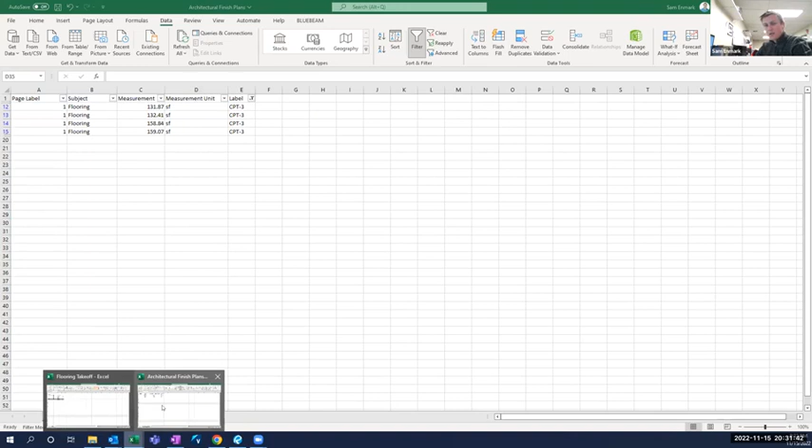Another cool tool you can use, an add-on with Bluebeam into Excel, is the quantity linking. So for instance, this carpet 3 here, I'm going to quantity link, and I'm going to add from my desktop here my architectural finish plans, which is the sheet I was just working on.

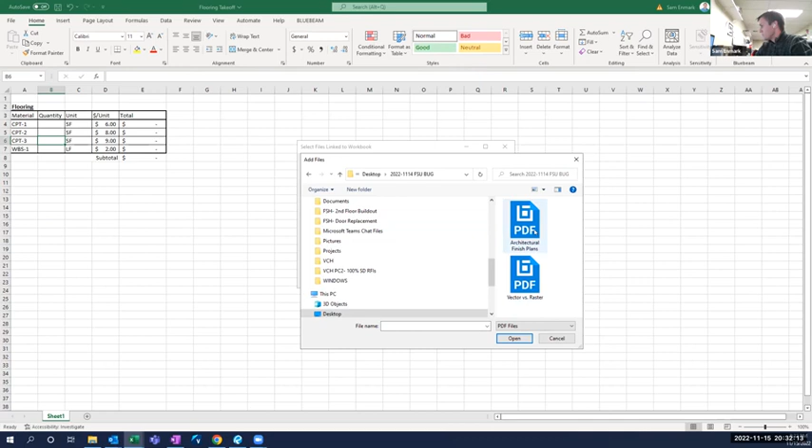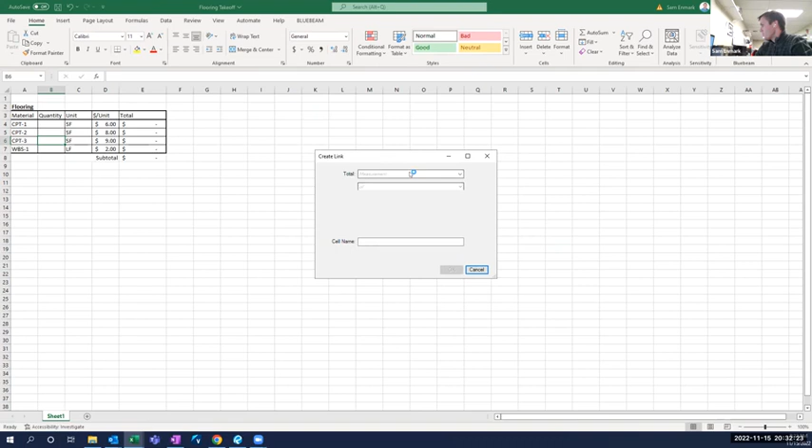And then I can actually go in and find my carpet 3, hit OK, and then it automatically brings it in from that Excel or from that Bluebeam. So now if I go to Bluebeam, I'll try to split screen here on my screens.

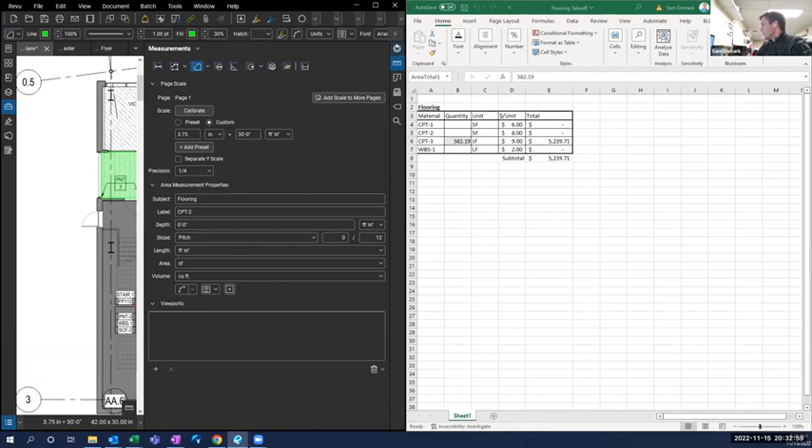So now, what is my area set to? If for whatever reason—this is kind of just another example as I go through—I did carpet 2, but now I want to jump back to carpet 3. So I'm going to click on carpet 3 and set it as default.

So now the next tool I use is going to be for carpet 3. So now I'm going to go into my area and select another room.

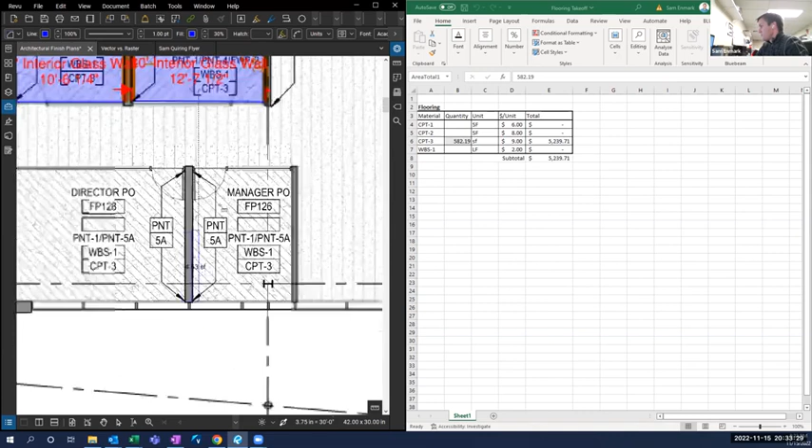So I added 125 and this jumped in my Excel from 500 and something to 708. You could do that with pretty much everything as long as you've got your labeling correct. You could quantity link all of this to your Bluebeam takeoff, and it would continue to update as you're updating your Bluebeam.

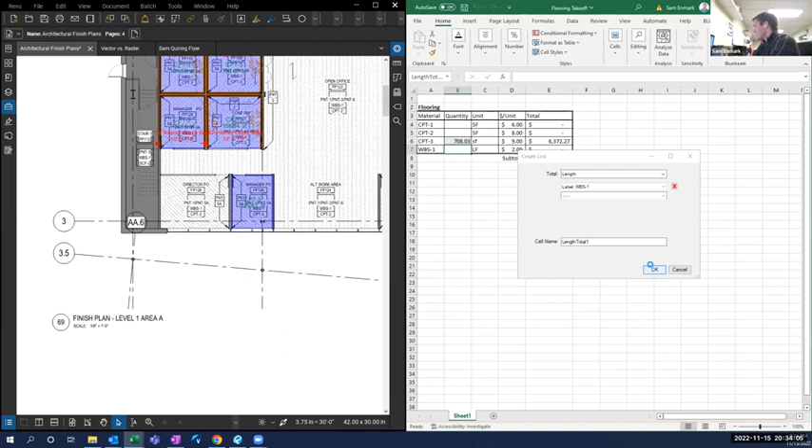So I guess that's kind of the gist of what we'd be doing with the quantity takeoff. I'd say the most important part, as I discussed in the beginning, is making sure you've got your nomenclature and naming right. Because if you get off on your subject and label, it creates a mess trying to figure out what you've done and rechange individual items one by one. So make sure you've got those labeled correctly as you're doing these, and make sure you've got your scale right.

Other than that, quantity takeoffs are only as good as the time you spend doing them. It can be tedious sometimes trying to count everything and make sure you've got everything captured. But if you spend the time to actually do it and make sure things are labeled right, you end up with a lot of good data that can be exported, linked, and applied into different aspects of your estimate. It's a very useful tool not only to do estimates, but also to check estimates and make sure subcontractors are giving you quantities and numbers that are accurate.

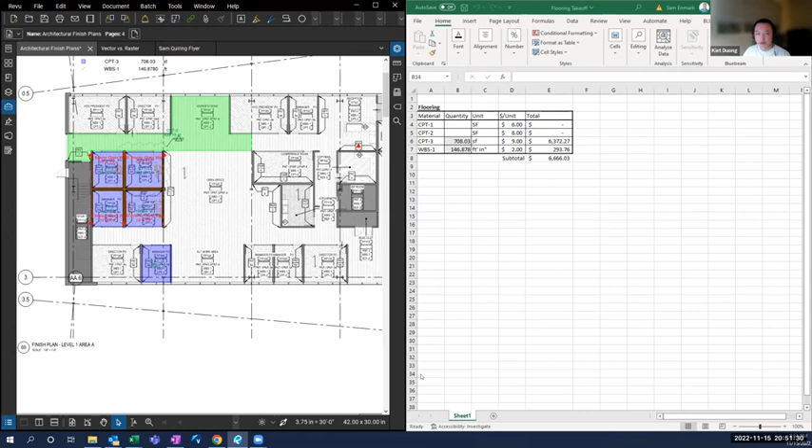Yes, we try to, but like the one that I am working on right now is kind of weird. I don't know how to, let me show you this. Let me share my screen real quick, and then I can show you exactly what I'm talking about.

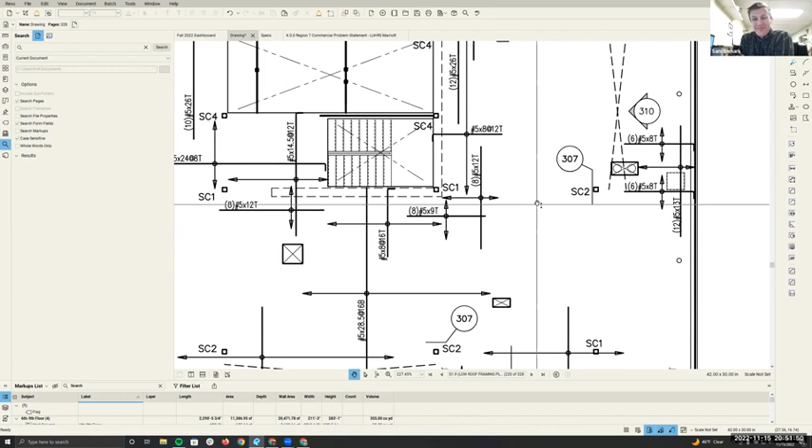Yeah, we could ask lots of questions. We might even ask you more questions, Sam. Call you up and ask you. Absolutely. Yeah, I remember Reno, it was fun. Did you do commercial?

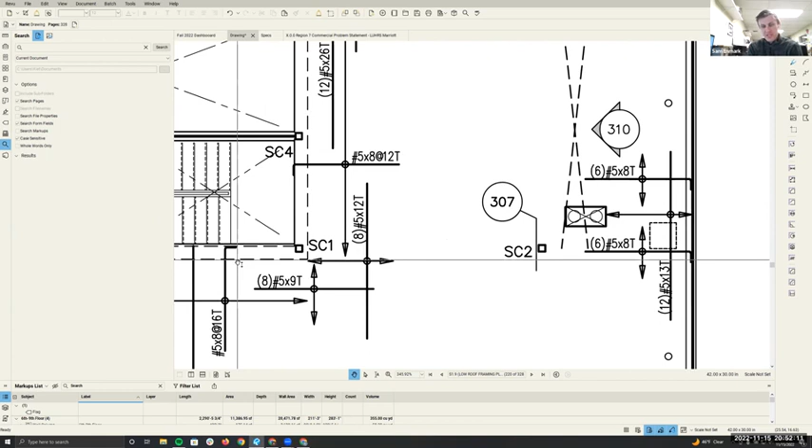No, I didn't. I competed 3 times. The first one I did was LEED, it was called LEED at the time, I think it's sustainability now. I did heavy civil, and then I did mixed use.

Yeah, but it's kind of weird to me, I've never seen something like this before. Why don't you just call out a section, just a number, and you have to go through the plans to the details to see it. Go to SC2 and then looking for number 307 probably. I think SC2 is a call out for one of these things here. Is this just a slab steel deck column plan? Yeah, oh goodness. So you have to go through this, these things, and it's just a headache.

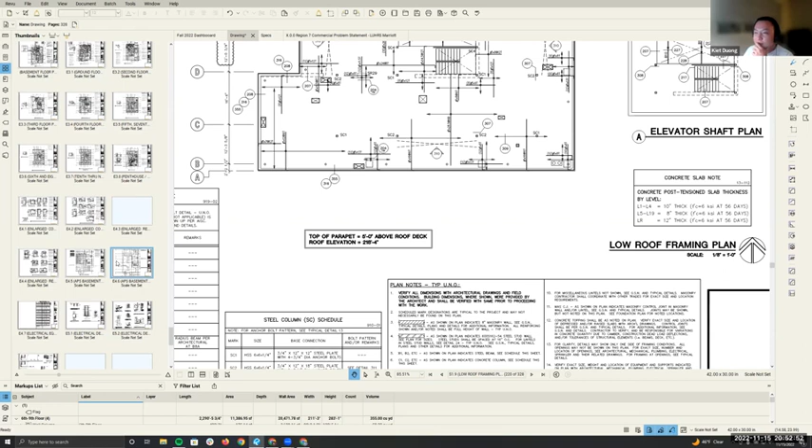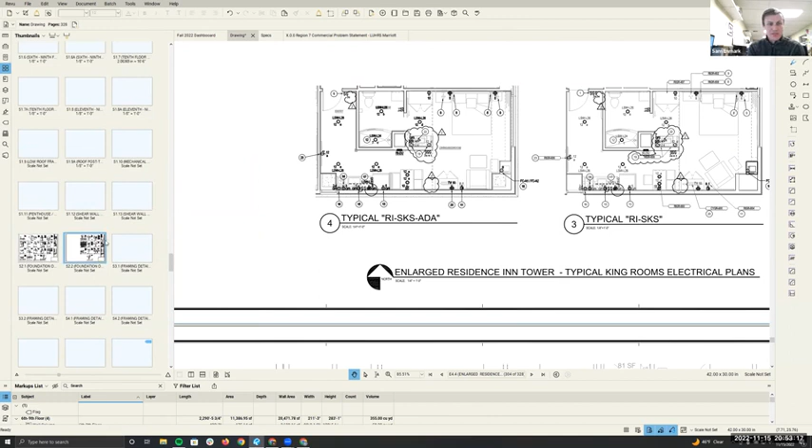That is unfortunate, because what I was going to say is, if you could link all of your drawings first thing when you get them, it makes navigating them much quicker. But if you run up against something like this where they've got an odd situation, and that looked like it was the structural drawings that had kind of odd references in there, you're going to be, I'm not going to say out of luck, but in the time frame that you have to do it, it's going to be difficult to get those to link properly.

Yeah, see, there you go. You're looking for that detail 307 on SC2, and it doesn't even reference a sheet. That's the thing, I know how to do the batch link, but because it doesn't have that sheet reference, for example if they just said 307 on S4.1, I could do the batch link and you could go there. But because they're doing this, I'm like, really? How do you do that?

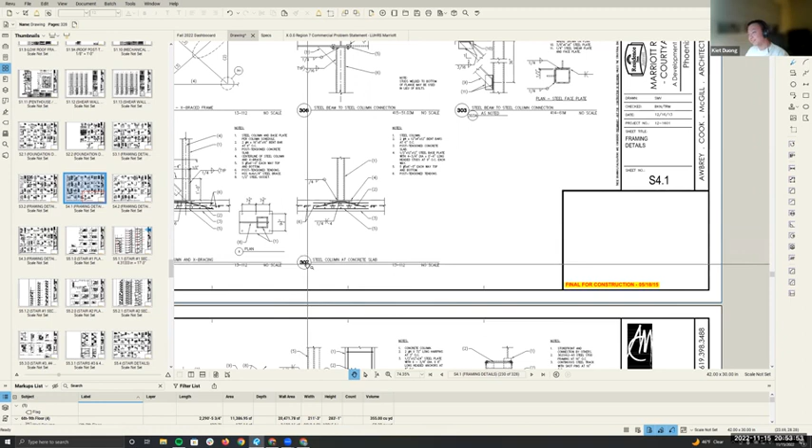I'll be honest, Kiet, I haven't seen a drawing that does that before, that doesn't have a sheet that goes along with it.

But again, like we were saying, every designer does it differently. So it's never the same. Just send an RFI and ask them if they could redo their drawings.

I think one thing to note, Kiet, is you might see on the side, under the notes sections on some of those sheets, a call out type, and it might say reference sheet, you know, SC4, to all those other sheets.